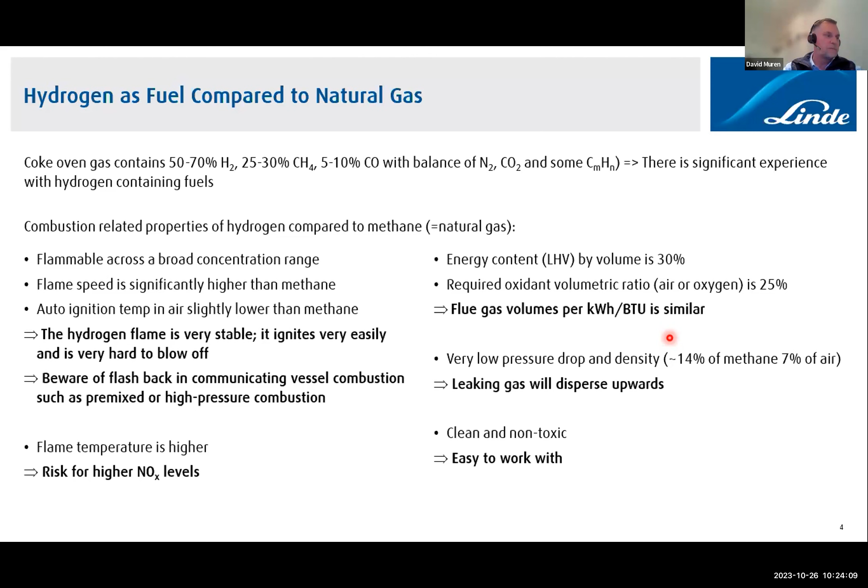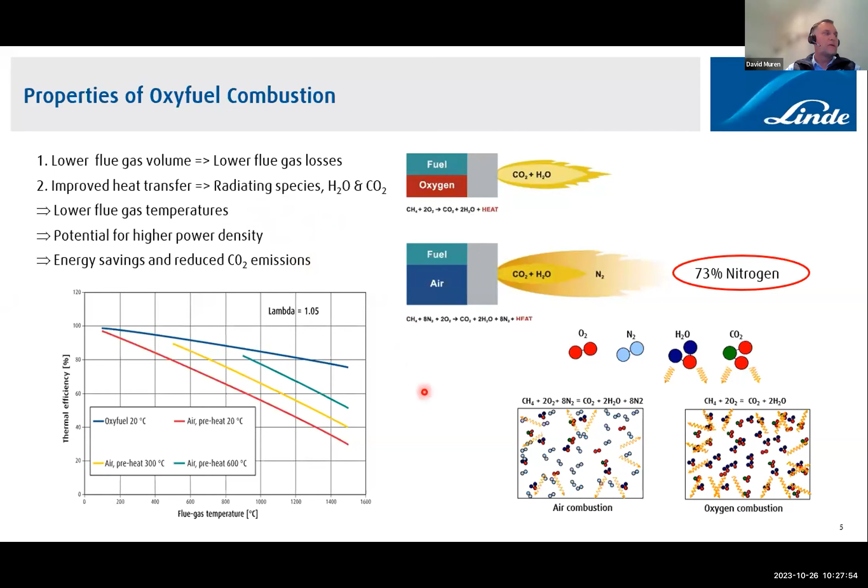Now, these two in combination lead to a lower mass flow of off-gases, meaning a longer residence time, and improved heat transfer means the temperature will come closer to equilibrium. So you'll have a lower off-gas temperature further along in Oxy-Fuel than in air combustion. You can also use that to fire harder since the off-gas amounts are lower. Both of these will lead to energy savings and CO2 emissions reduction.

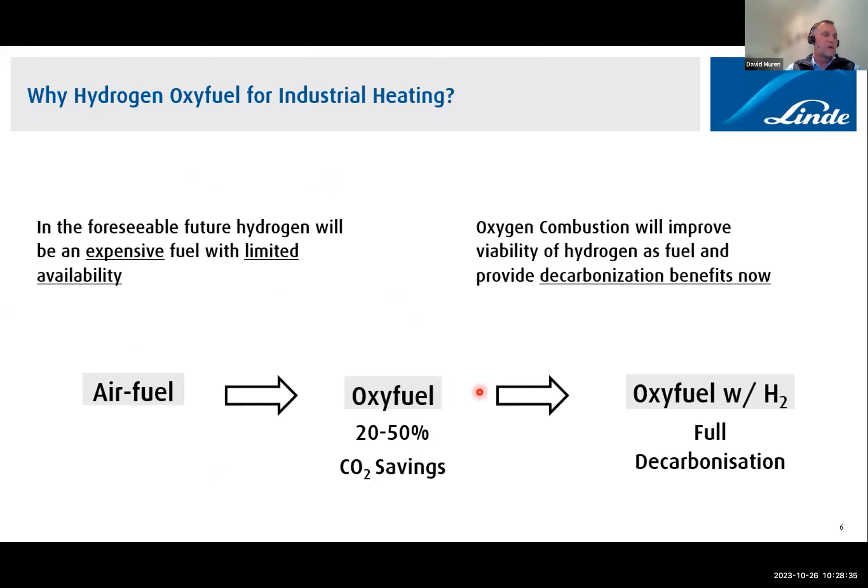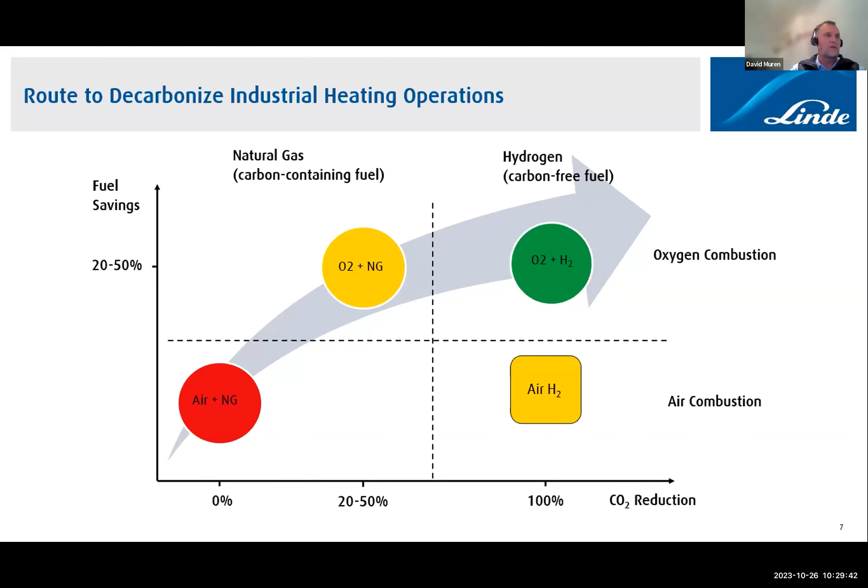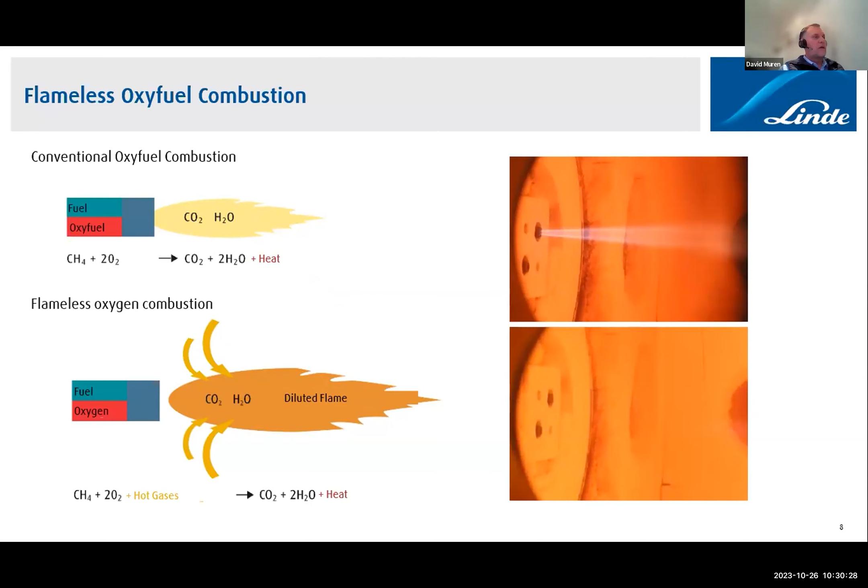That means low flame temperature even with hydrogen as fuel. This was tested at our combustion lab in Stockholm in 2019 with material from our customers, using both engineering steels and stainless steels, doing a heat-up and a 1, 2, and 3-hour soaking of the material to look at both combustion properties and material properties like scale formation, decarburization of the steel, and any effect on the alloy.

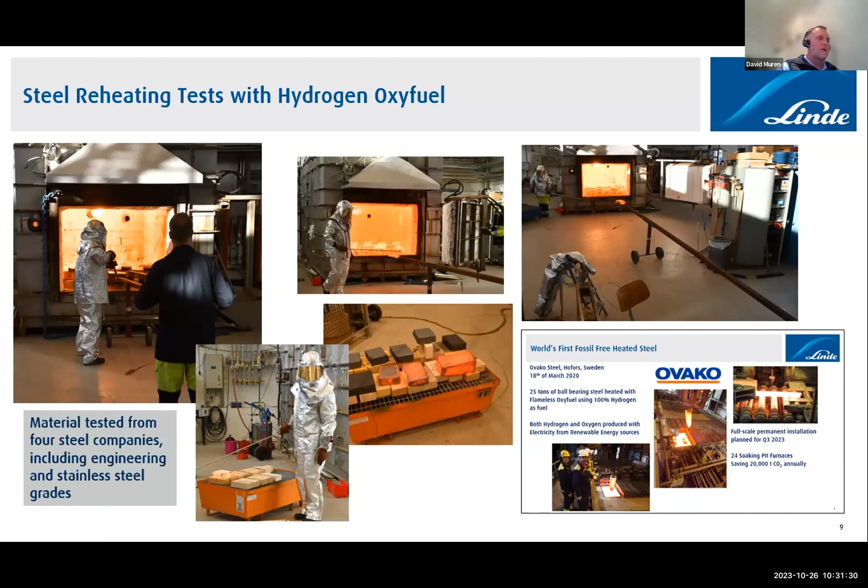What was concluded in these tests was that there was a very insignificant effect on scale formation and on the base material. Also, we saw that we could achieve similar concentration emissions of NOx as with natural gas as fuel.

Now, we did similar trials with aluminum melting. Here the focus was to look at dross formation and also the content of hydrogen in the melt. These were quite successful, and we showed that even high magnesium-containing alloys, which are sensitive, could be processed without any concerns.

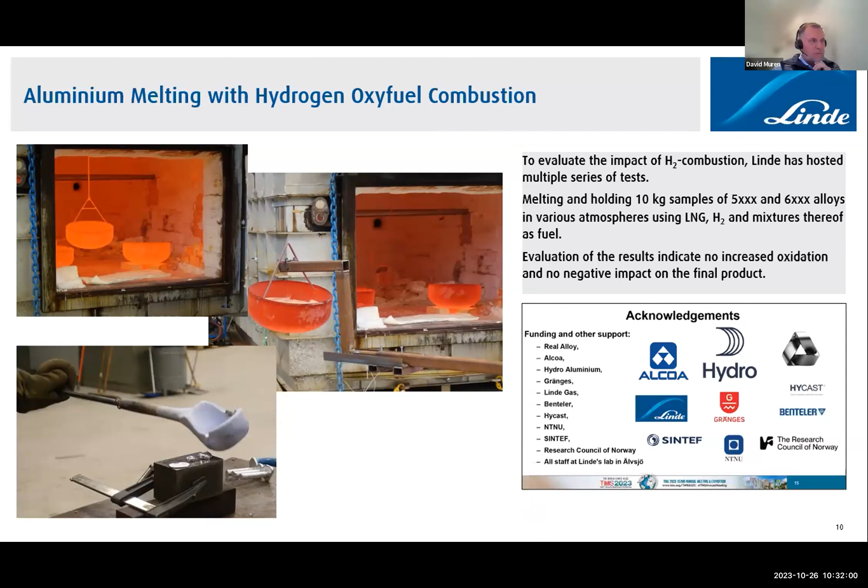Now, getting to the summary. Oxy-Fuel combustion with existing fuels will significantly reduce CO2 emissions by increasing fuel efficiency. We have demonstrated that reheating furnaces and aluminum melting can be operated with hydrogen as fuel without any negative impact on the process or the materials heated or melted. Flameless Oxy-Fuel works well with hydrogen as a fuel, maintaining the benefits of low NOx formation and temperature uniformity in the process as well.

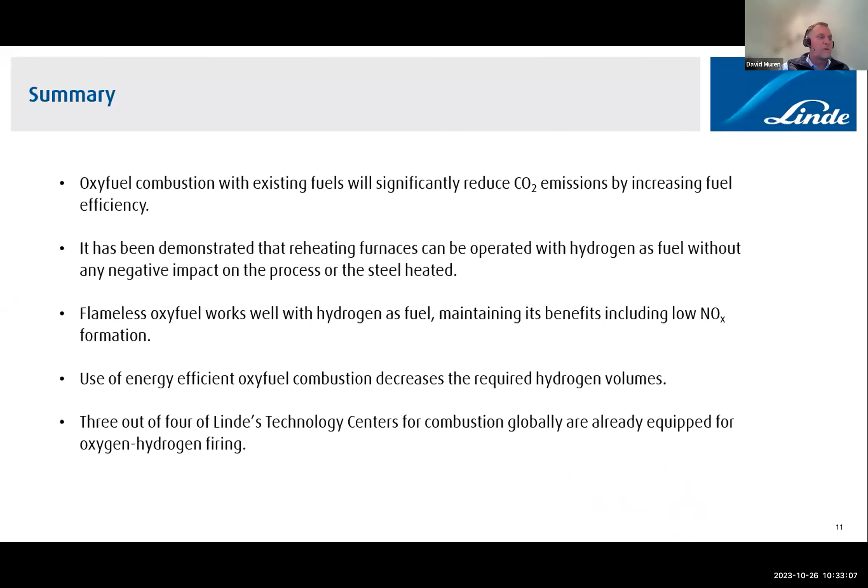So we see that the use of energy Oxy-Fuel combustion decreases the required volume supply of hydrogen for the process. Now, 3 of our 4 Linde technology centers globally are equipped for hydrogen combustion, and the 4th in China is looking to do that in the next year or so.

That's the end of my presentation. Thank you for the time, and I'm sorry if I ran a bit late here. You're pretty close, David, you're only 1 minute over, so I think we're pretty good on that one.

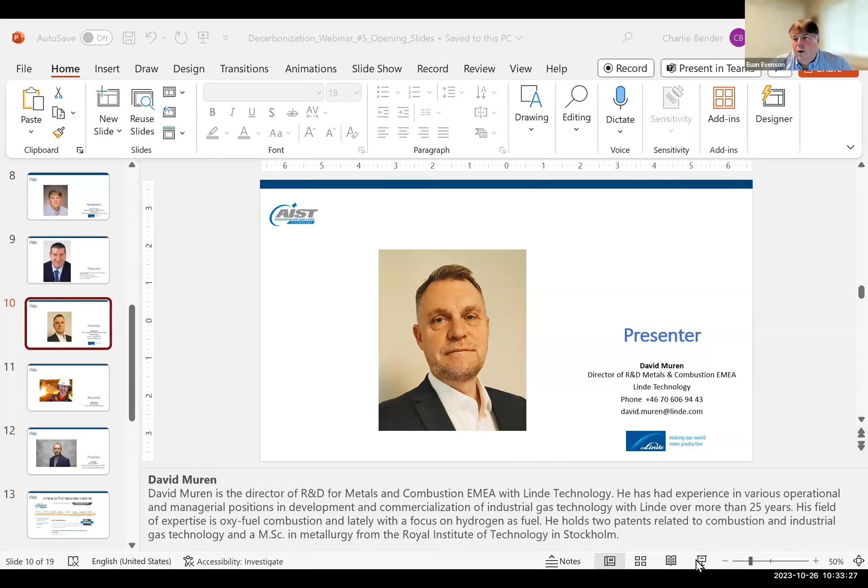One of the points that's been raised, and it often is when people are considering hydrogen combustion, is that since the density of hydrogen is much less than other gases, does that affect the size of the nozzles? And for that matter, does it affect the size of piping as well? Will the hydrogen nozzle be larger or smaller than a regular lance? So maybe, David, you can comment on the experience converting fossil fuel fired systems to hydrogen, the changes required, and how difficult it is to do.

It's a very good point, and you can say that there are two mechanisms that I mentioned. First of all, the lower energy density means that you need to put through 3 times the flow, but then the lower density also means that there's lower flow resistance to the hydrogen going through. What we've seen is that you need to have a slightly higher pressure to use basically the same equipment as you have today. Somewhere it's going to be dependent, but somewhere between 20 to 30% higher than what you have today.

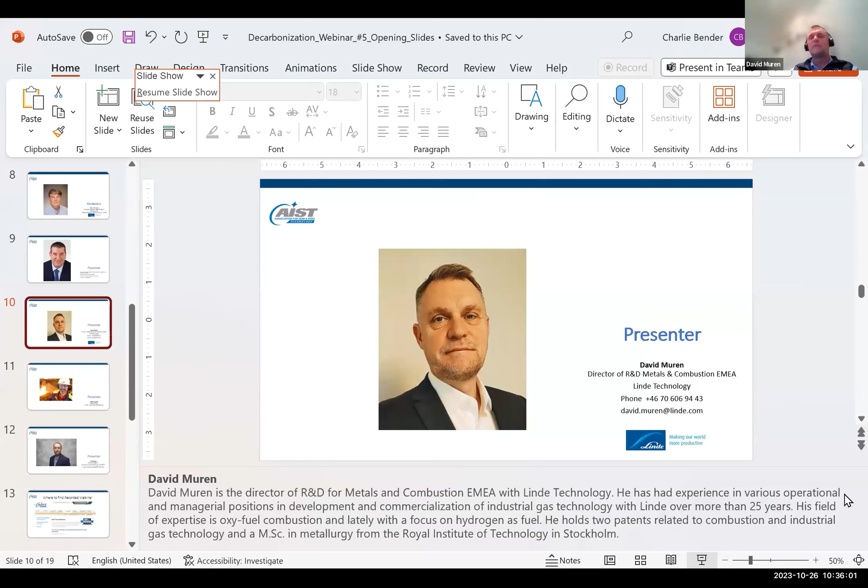So it is slightly higher, but not dramatic or significant in most combustion systems, especially since the hydrogen most of the time will come supplied at a higher pressure than the natural gas, provided that your combustion system can tolerate that. Now, when it comes to nozzles, yes, higher flow through, but then you also have the aspect of increased flammability, and also lower mass of the gas stream coming out. So these two effects seem to, at least in most of our stage-type combustion, counteract each other, so you can achieve the same type of flameless combustion with a higher flammability. So higher speed of the gas and increased flammability counteract each other, so you'll still achieve similar type of performance, I would say.

Okay, thanks. There's a question with respect to the economics of Oxy-Fuel, not specific to hydrogen, but Oxy-Fuel in general, relative to air fuel. I know that you have a lot of experience looking at that in different parts of the world. Can you make some general comments on that? Yeah, I mean, the general comment would be if your fuel is cheap, it's going to be much more challenging to motivate you using oxygen as an oxidant compared to air.

Now, with that said, if you have on-site production, you might have periods where you have excess oxygen available, and we have systems and methods of hybrid oxygen combustion where that oxygen can be utilized when it's available, and then you can revert to your air combustion when it's not. Another interesting aspect is if you have on-site hydrogen production, you will also produce oxygen. Now, how that is captured in your electrolysis is a different story, but going forward, when the volumes get greater, if that oxygen is captured, dried, and pressurized, it can be used in the combustion process. I think our next presenter may comment on this, actually.

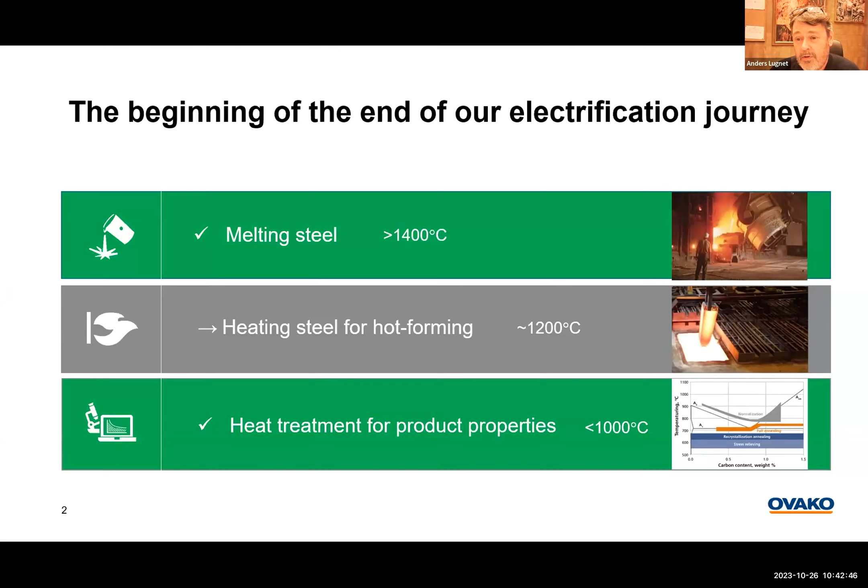About 64% of our carbon dioxide emissions come from combustion, and all that part can be replaced by hydrogen. We have a plan that by 2030, all our combustion carbon dioxide will be eliminated, using hydrogen from electrolysis. The next step will be biochar instead of petroleum coke and anthracite, but that's a different story.

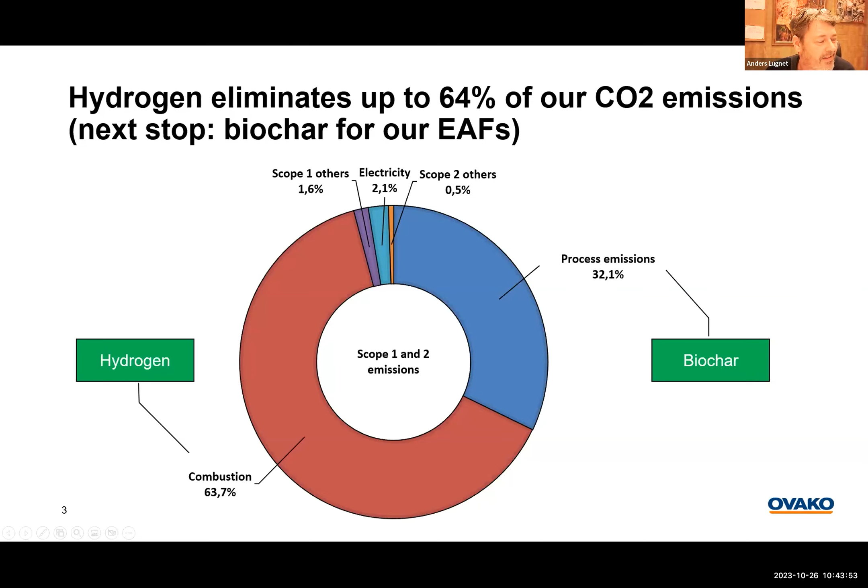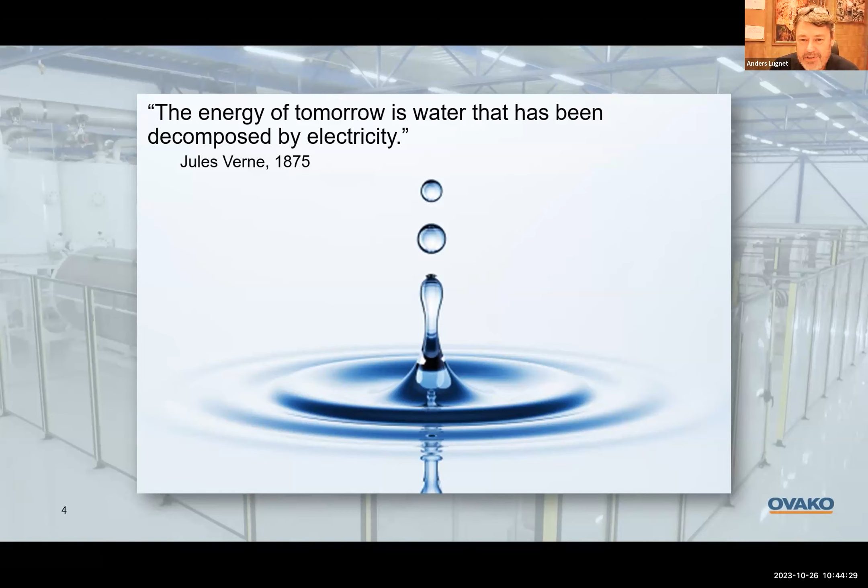The French science fiction author Jules Verne said this 150 years ago: 'The energy of tomorrow is water that has been decomposed by electricity.' 1875—that's pretty amazing. Most people didn't know about electricity at all back then, but this guy talked about what we are actually doing now, 150 years later.

So why do we go for hydrogen as fuel for reheating furnaces? David has explained most of it, but if we look at it this way: rolling mills normally use fossil fuels such as natural gas, propane, or oil to fire the furnaces, most often with air as oxidizer. This usually gives a carbon dioxide load between 100 and 200 kilograms per ton of steel in the rolling operation alone.

These processes are extremely difficult to electrify directly with resistive heating. So hydrogen as fuel with pure oxygen as oxidizer gives the highest efficiency and zero carbon dioxide emissions in the reheating process, if the electricity comes from fossil-free sources.

Another really good advantage in reheating is that when you use hydrogen, there is absolutely no risk of carbon monoxide at all. So it's a good environmental thing within the factory and for the people around the furnaces.

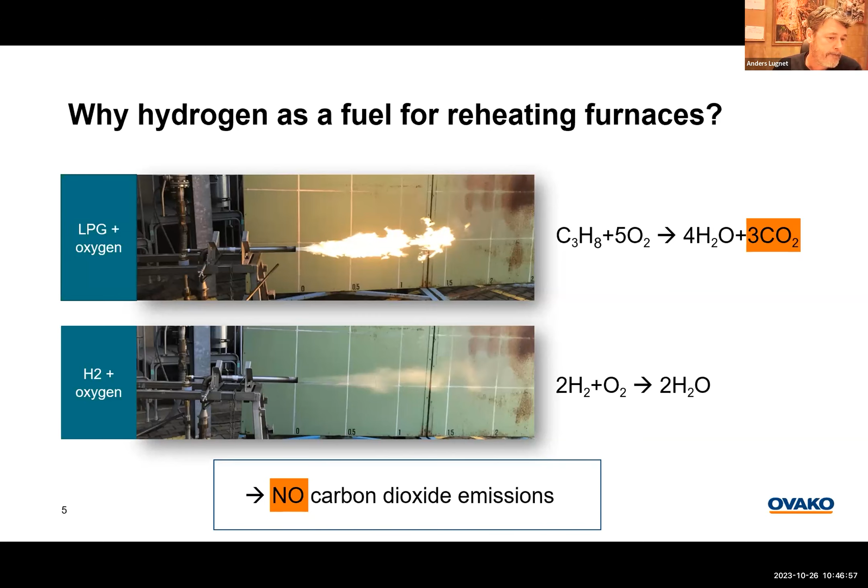Our systems—there were questions about changing nozzles and stuff. We use Linde burners, flameless, made for propane, and it is absolutely no problem at all to use those burners with hydrogen instead. We can switch fuels in a split second, and that's what we do.

Because of this, we actually don't need hydrogen storage—we're not dependent on hydrogen. Our storage is our propane tanks; we have 800 tons of propane as our energy storage. So we only have a very small hydrogen buffer, really, for about half an hour's use. We use the hydrogen at the same pace as we produce it.

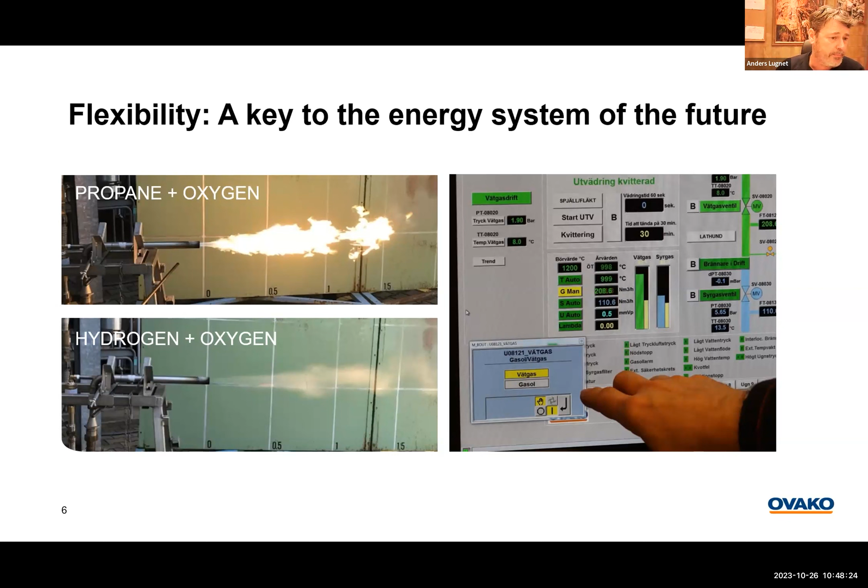I would say about 15 years ago, the thoughts came into my mind about using hydrogen and oxygen. The reason for that was that the environment around these furnaces was really terrible. They were, at that time, many of them heavy oil fired furnaces, and it was smoke, soot, carbon dioxide, oil leakages and stuff. So at that time I thought that hydrogen and oxygen, that must be the future when it comes to clean factories and so on.

In 2020, in March, COVID had shut down the world, but Ovako, together with Linde, we made the first full-scale trial during this period, and we showed that this works also in real production. Lab is one thing, but how will temperature uniformity and so on be? We did this in production scale, and we showed that it worked. This was extremely important to show. It would have been a showstopper if the results were not as good as when we used LPG as fuel. But the trials showed that there was no negative impact whatsoever on product quality or rolling results.

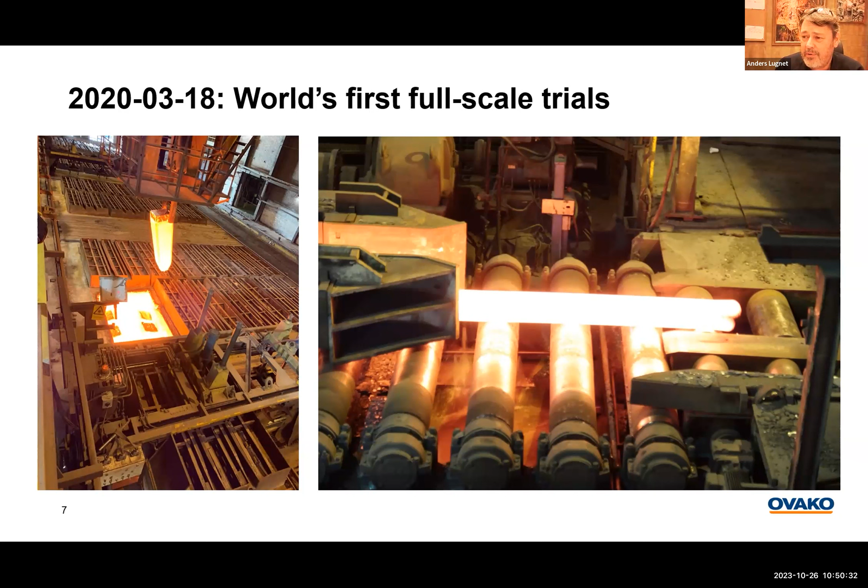So from this point on, we really tried to work to implement this in a larger scale. And how did we get there?

We had a strategy that our board took some 10, 11 years ago. At that time, the strategy was how could we reduce fuel use and so on, but it was really adjusted in 2020 to how can we reach zero emissions.

The points have been that we will use electricity wherever possible, and we will use direct electrification where possible. We think below 1000 degrees C, you can still have good productivity with direct electricity. Another point was that we will go away from oil and we will go towards LPG.

We will change our air fuel systems to Oxy-Fuel systems, and we have done that. We have 60 installations today with Oxy-Fuel. Also we standardized how we work with our control and automation equipment. We have about 130 furnaces in the company, and it's important that we don't have too many different systems here.

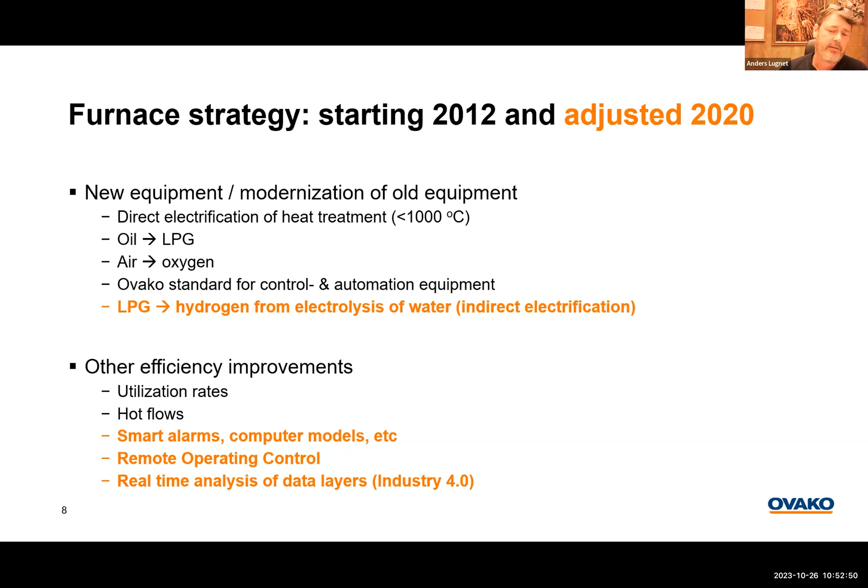What we added in 2020 after our full-scale trials was that, when possible, we will use hydrogen from electrolysis of water instead of LPG. So that's what we have been working with.

There are on paper advantages to using an old building, but I would say it's not recommended to do that, because a lot of things happen that you don't plan for.

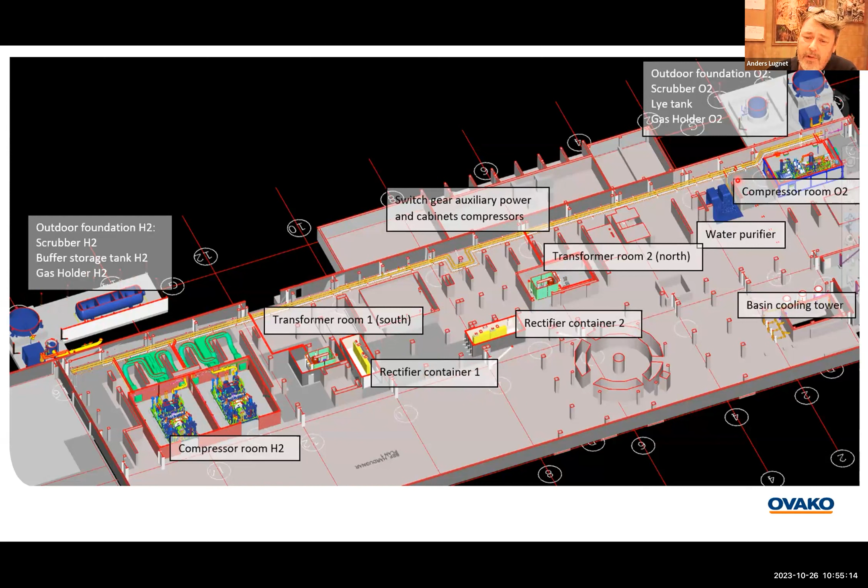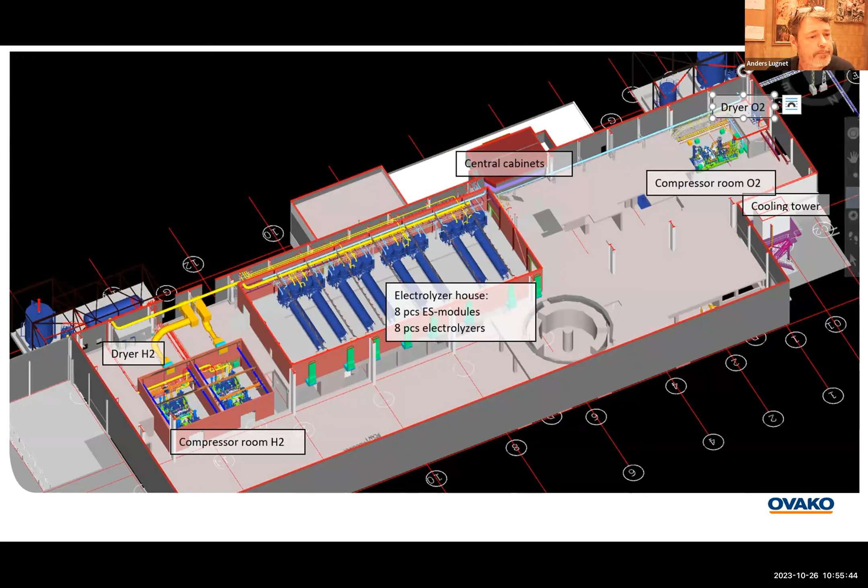And on the first floor we have the electrolyzer house. It would have been much easier to make a new building somewhere else rather than using this old building, for sure. It took longer and it was more expensive than expected. But this is what it looks like today.

Professionally, this is a real milestone for me. It's using fossil-free electricity to split water into hydrogen and oxygen to replace fossil fuels. This makes a difference when it comes to decarbonization. This is, as you see, the real thing. It's of course a PowerPoint, but this is as close as you get without actually being there.

For Ovako, this is really the starting point. We will make 5 or 6 of this type of hydrogen plants until 2030. That's our plan. So we are trying to take the lead in this area, and I think the picture says it all. Our industry doesn't need to be dirty. This is really clean energy in a clean environment.

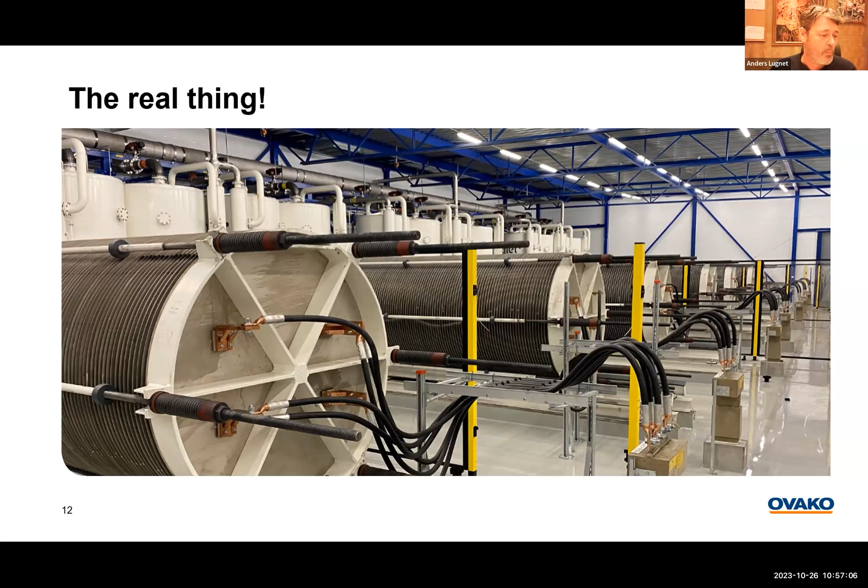So what about the energy balance? Is it worth it? You often hear that it takes huge amounts of energy to produce hydrogen, and the efficiency is terribly low. But I think in Ovako's case, that's not correct. If the target is to eliminate carbon dioxide from the process, I would say that this is by far the most efficient solution available.

And in Ovako's concept, we don't only use the hydrogen, we also use the oxygen, and we do recover some of the waste heat to our district heating system. So the efficiency is about 76% at full load, and I would say that's not bad at all. And that's before any flue gas recovery. So what you see here is that the green colors show useful energy, the red is losses, and blue is the potential for flue gas recovery.

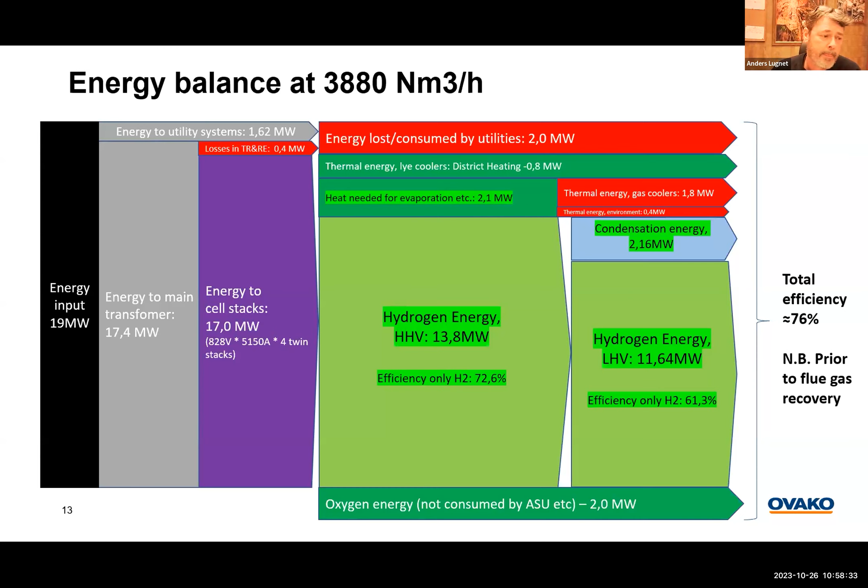So what do we think is the success factors to do this? We for sure believe that you need a large continuous hydrogen offtake at low pressure, and when I say low pressure, in our case it's up to 39 bars, but with today's standard, that's low. You often hear gas industry talking about 700, 800, 900 bars now on hydrogen, but of course it costs to compress. So I think a large continuous offtake at low pressure is key.

Also, we believe that you should build systems where you don't need to have huge hydrogen storages, because hydrogen storage is extremely expensive. We would rather buy another electrolyzer than making a storage. We have our existing LPG infrastructure as storage. Also, it doesn't make you dependent on hydrogen. So as I said earlier, we only have a very small hydrogen buffer.

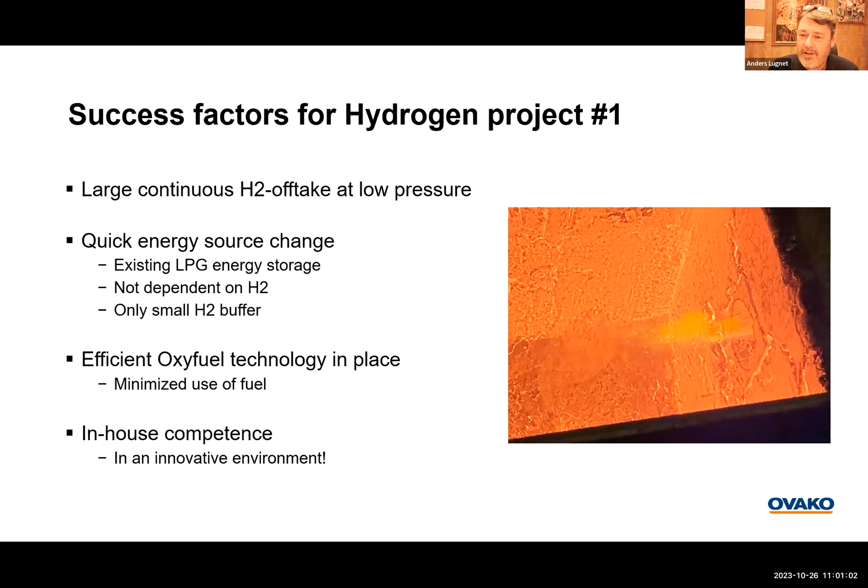So these were the success factors. And by that, I'm ready.

Well, thank you very much, Anders, for an excellent presentation. Very interesting, and it shows that definitely Ovako is working in the future. I have several people who are very interested in your presentation, so there are several questions to be answered. So I'll start with the first one.

Your EAF doesn't have any natural gas burners, is that correct? Or do you have supersonic oxygen in your EAF? We have 3 EAFs, and 2 of them use supersonic burners, with propane today, but we will for sure try hydrogen on these ones. Okay, but that's not the first step.

Okay, thank you. Are there any efficiencies or reduction in power demand to be realized when utilizing hydrogen as a fuel source in designing the overall system to produce metals? Well, in our reheating furnaces, we already have Oxy-Fuel systems installed, and to change from, in our case, LPG or natural gas to hydrogen is really no issue.

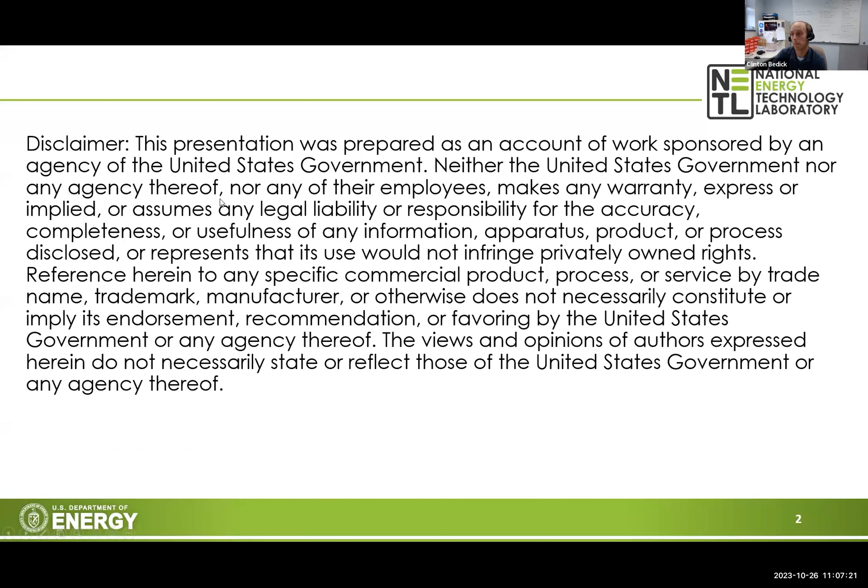I'm just going to give a quick picture of what the National Energy Technology Lab is. We're one of 17 DOE national labs in the US, focusing on energy research and development. We're one of 3 applied research labs, and we're uniquely government owned and operated. We have 3 locations: Albany, Oregon; Pittsburgh, Pennsylvania, where I'm located; and Morgantown, West Virginia. There's kind of 2 arms: one administers and monitors DOE funded projects that go out for solicitation and award, and the other is the in-house research that goes on at these labs. That's where I work.

Some of the major initiatives we're looking at now are decarbonization and carbon management, and that's kind of where this ammonia work falls.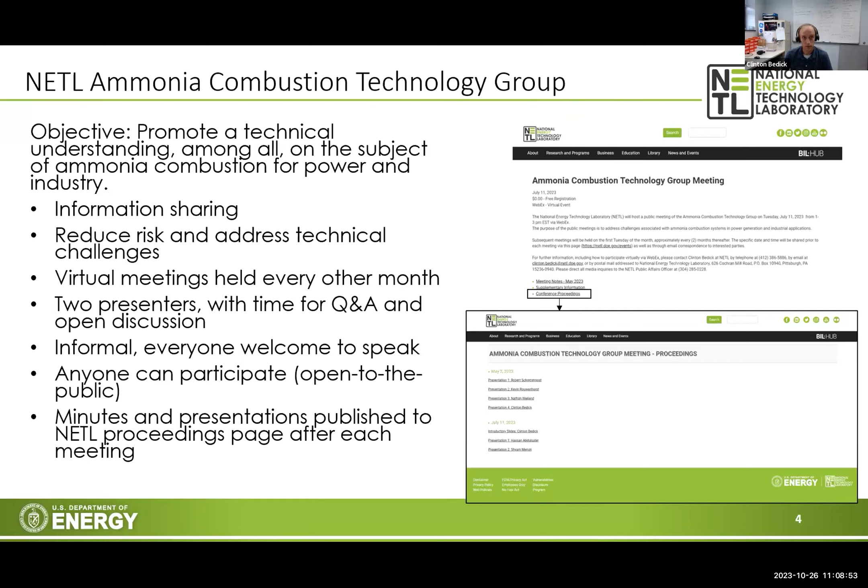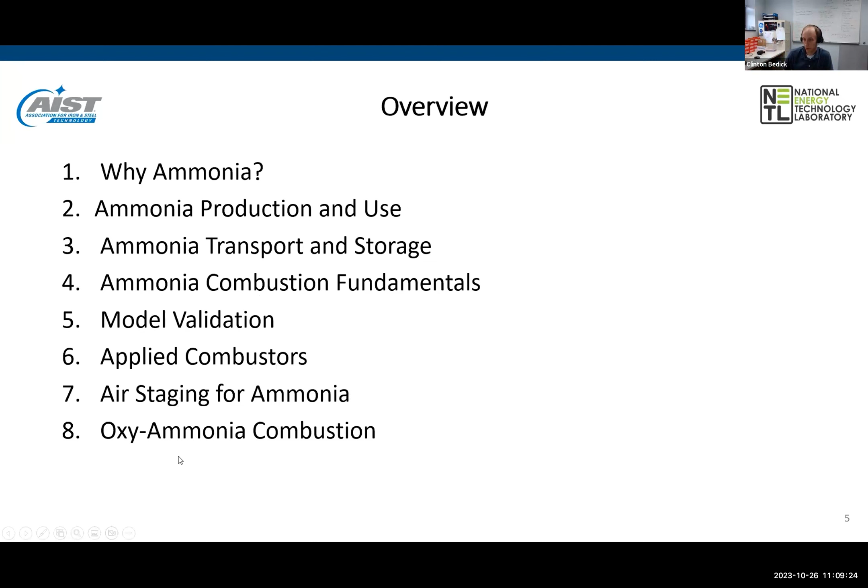So what I'm going to talk about today: why ammonia, starting there, some brief comments on production, transport, and storage aspects. Most of what I'll focus on is the fundamentals and unique technical challenges of ammonia, looking at things like model validation, doing this in more applied systems, introducing the concept of air staging for ammonia, and closing out with a look at oxy-ammonia combustion. So really, what's the role of ammonia?

Certainly a hydrogen carrier, right? So there's 3 molecules of hydrogen, 1 nitrogen molecule. Similar to hydrogen, it can be a carbon-free fuel, and similarly it can be used as chemical energy storage in the energy sector. It addresses a few of the challenges with hydrogen, and that's really the main interest here. Hydrogen has low volumetric density, so you have to store it at high pressure or very low temperature to get it into a liquid, and that can be energy intensive with high capital and operating costs. On the contrary, liquid ammonia can be stored at about 10 bar or minus 33 C, so it's more in line with what we're used to with LNG and LPG fuels. The other big advantage is an existing ammonia industry, mainly surrounding agricultural applications, so it's everything from synthesis, transport, and storage. One application could be converting hydrogen to ammonia, transporting it, then converting it back before utilization. But really the big interest would be in direct utilization—if you can avoid that reconversion and directly use it in gas turbines or furnaces, there's certainly going to be an efficiency advantage there.

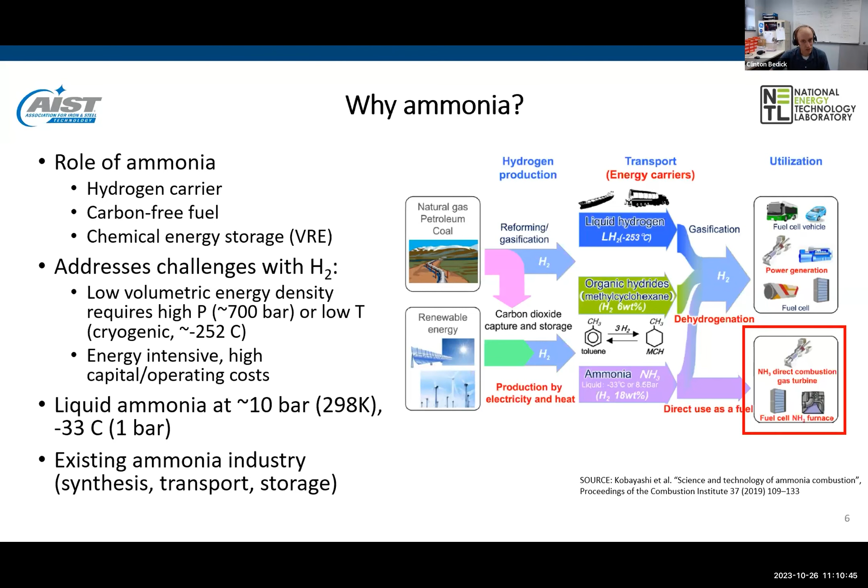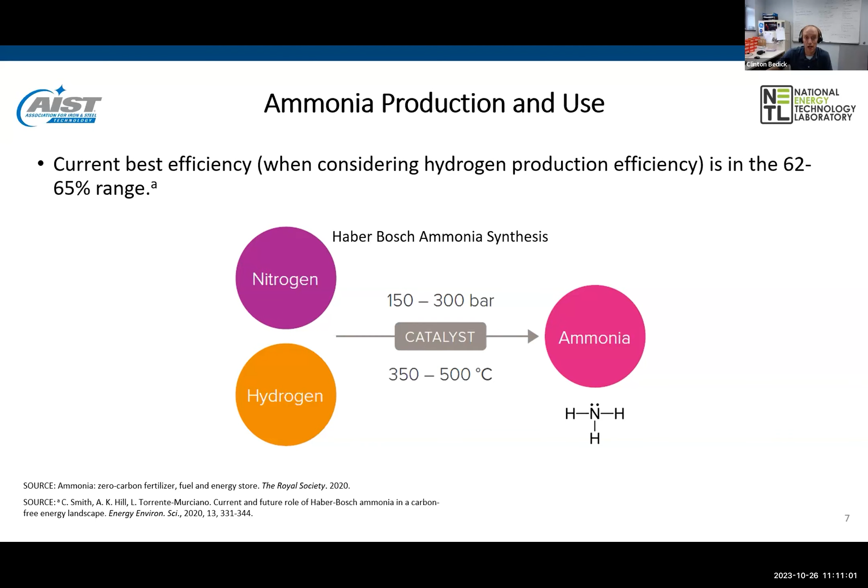Ammonia production is usually done using the Haber-Bosch synthesis. You have to generate hydrogen, combine hydrogen and nitrogen at high pressure over a catalyst, and you generate your ammonia. Similar to hydrogen, there can be various colors depending on the carbon intensity. Ultimately we'd hope to get to a fully green scenario where we're electrolyzing water—the last presenter showed some great examples of that—and then going to ammonia is a second step where you'll need additional sustainable electricity input. In the interim, what's typically done now is utilizing fossil fuel feedstocks, doing some reforming to get hydrogen and carbon dioxide. We can have a blue route if we capture that; otherwise it's considered gray or brown, which can have a considerable CO2 impact.

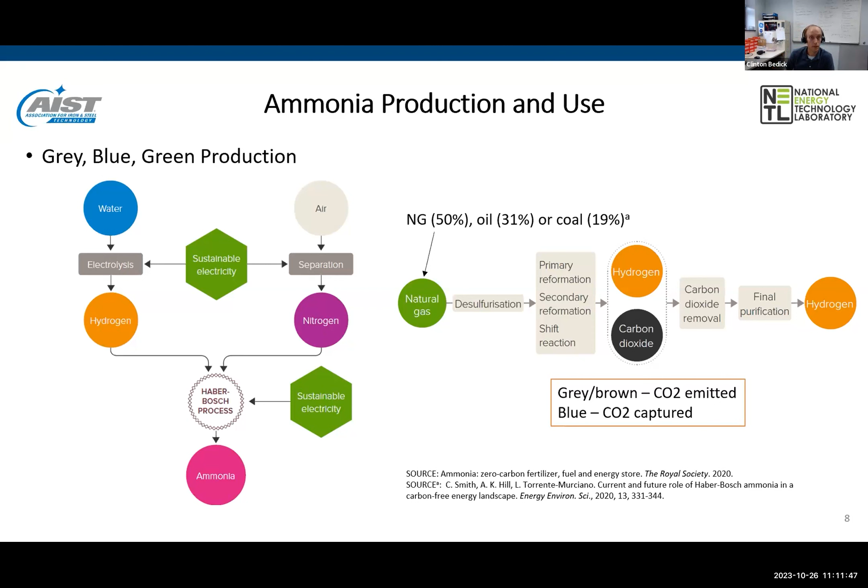There are existing worldwide shipping routes and pipelines in the US for ammonia, so that infrastructure does exist and could be expanded. One of the other considerations here is ammonia versus hydrogen.

Comparing these things, this is some results from an IEA study done a few years back, looking at costs of transport. One of their findings was that hydrogen made sense for shorter distances, but as you got to longer distances or long shipping routes, it made sense to convert to ammonia to do that transport and then convert back on the other end.

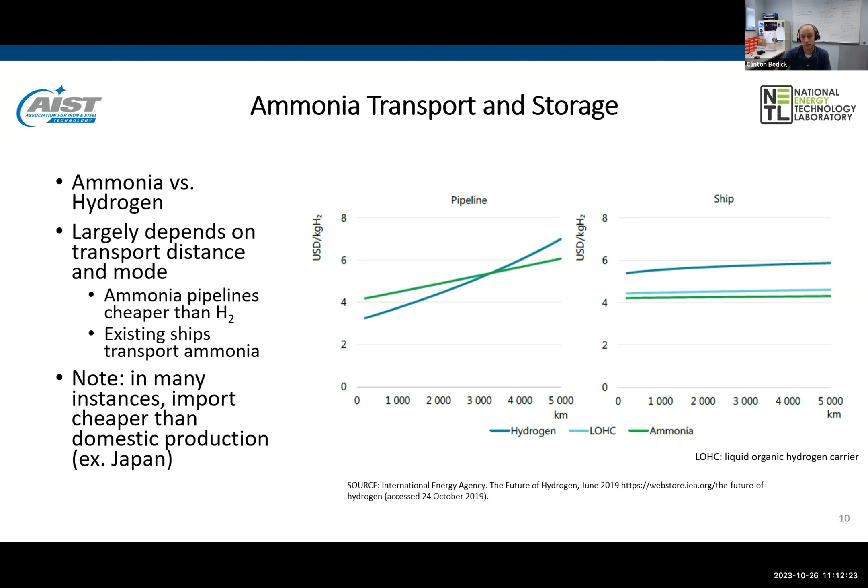I'm going to talk about the fundamentals a little bit, but first I just want to point out that while it's kind of new to look at ammonia as a carbon-free fuel, it has been done in the past. Back as far as the 1940s, there were recip engines running on mixtures of coal gas and ammonia. In the 1960s, the NASA X-15 used ammonia as a fuel. Pratt at UC Berkeley and Solar Turbines looked at it as a fuel.

Their general findings were it was tough to burn. Scale was important, how you design and modify a combustor. In a lot of cases back then, they had to use additional catalysts and different things to improve the combustion characteristics and get these things to run.

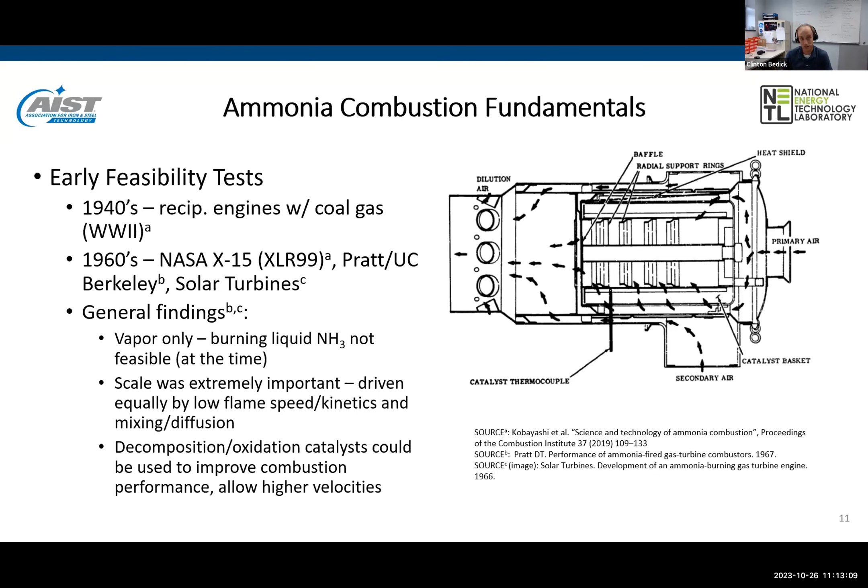From a fundamental property perspective, ammonia has a lower heating value and flame speed compared to hydrogen or hydrocarbon fuels. There's also some volumetric energy differences, so it's about 40% that of methane. You're going to end up needing about 2.5 times the fuel flow for equal power output, and certainly a narrower flammability range.

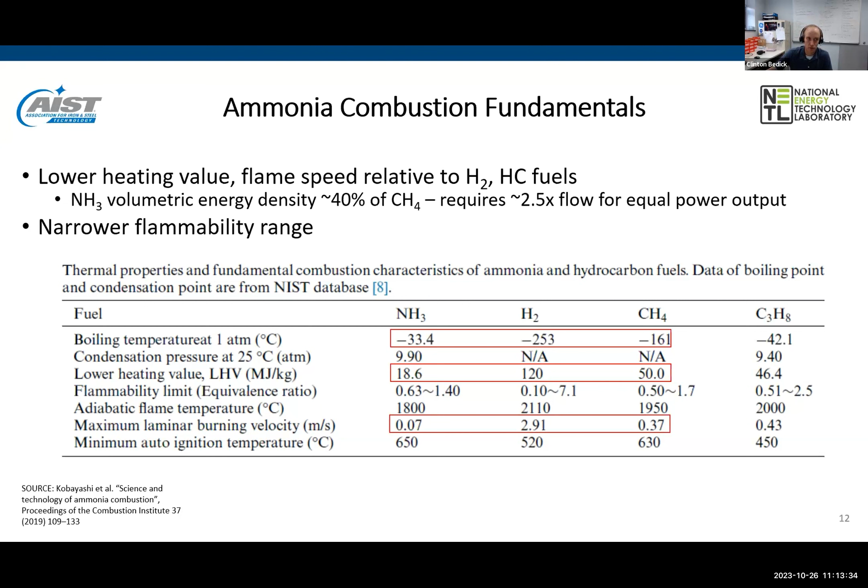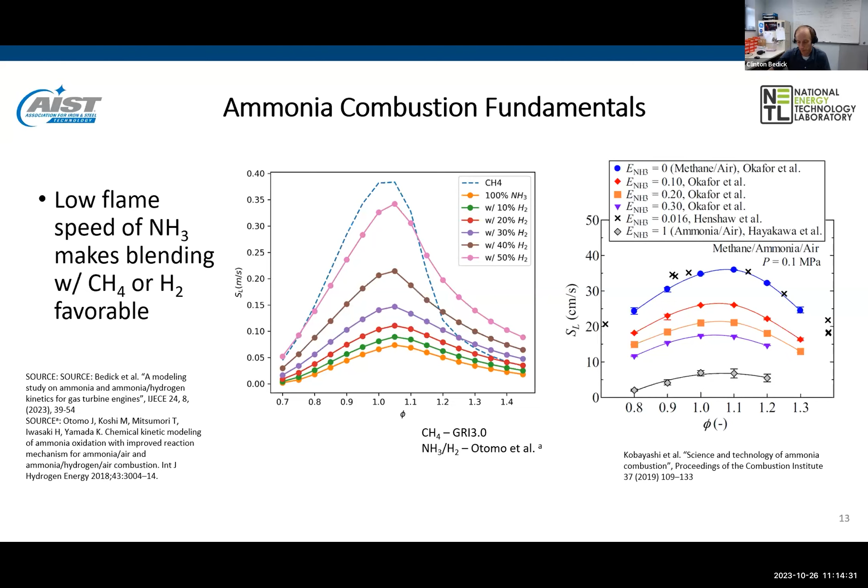The blue line here is methane. You can blend your ammonia with varying amounts of hydrogen, and at about 50% you can sort of match that methane flame speed. Methane is another thing you can blend with. Of course, there's still going to be carbon emissions in that case, but you're going to need a lot higher blending ratios to get the flame speeds comparable with those methane systems.

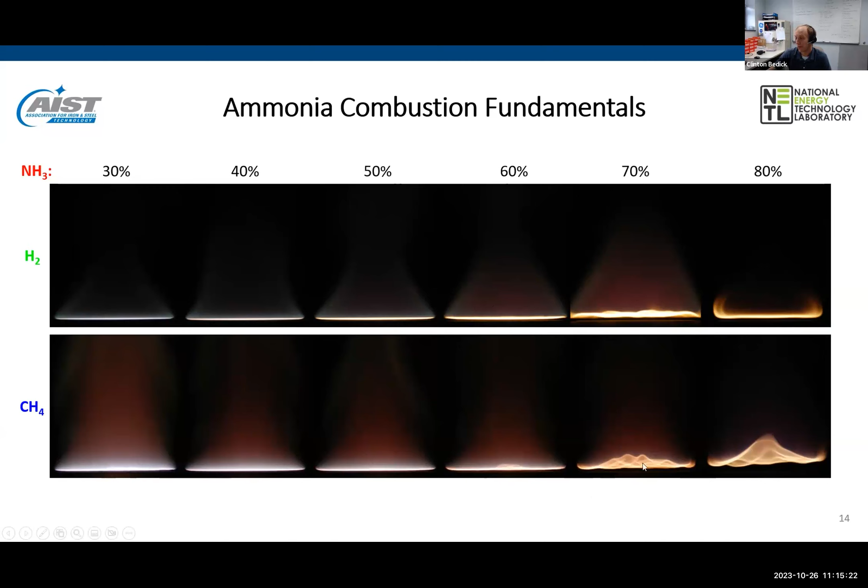It's very well stabilized. As you add ammonia, you start seeing this characteristic orange color, which is from the emission from ammonia-based compounds. You also see the flame zone thickening considerably. The flame starts to stand off and wrinkle up, and eventually it's going to end up blowing off. That blow-off point tends to be sooner for the methane, just because it has a lower flame speed compared to hydrogen.

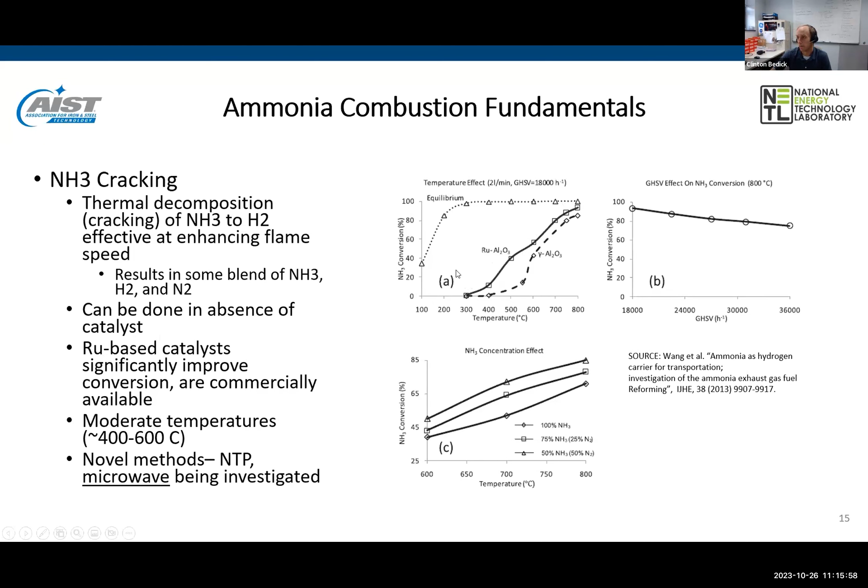One other effective way to enhance the flame speed and combustion properties here is using cracking. You can thermally decompose ammonia to hydrogen, resulting in a blend of ammonia, hydrogen, and nitrogen. You can do this in the absence of a catalyst, but it's been shown that some simple, widely available ruthenium-based catalysts can be pretty effective. Depending on temperatures and residence times in these reactors, you can almost fully decompose your ammonia to hydrogen with that process.

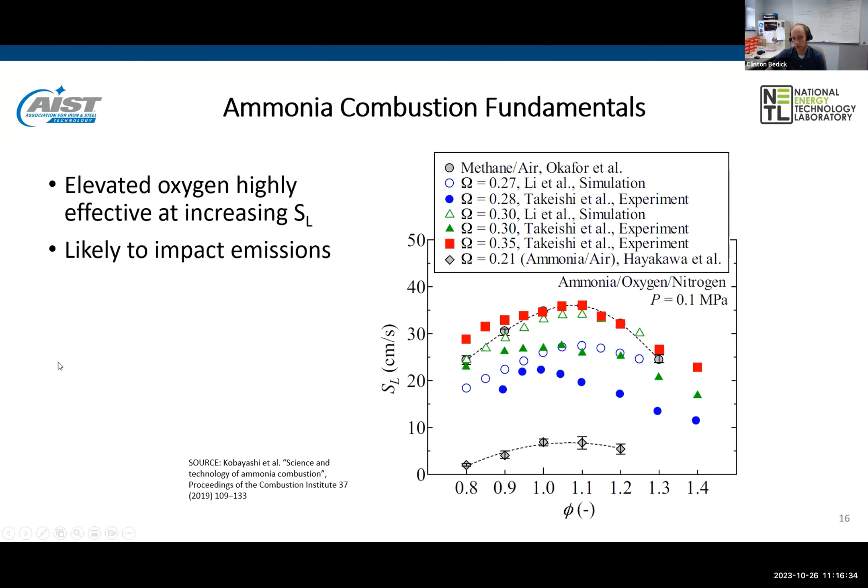So kind of the crux and the big challenge here in ammonia is NOx formation. This is pretty challenging to overcome, and it's really because of this fuel-bound nitrogen. It's a very different mechanism than what we're typically used to in hydrogen or methane, and it can result in very high NO concentrations.

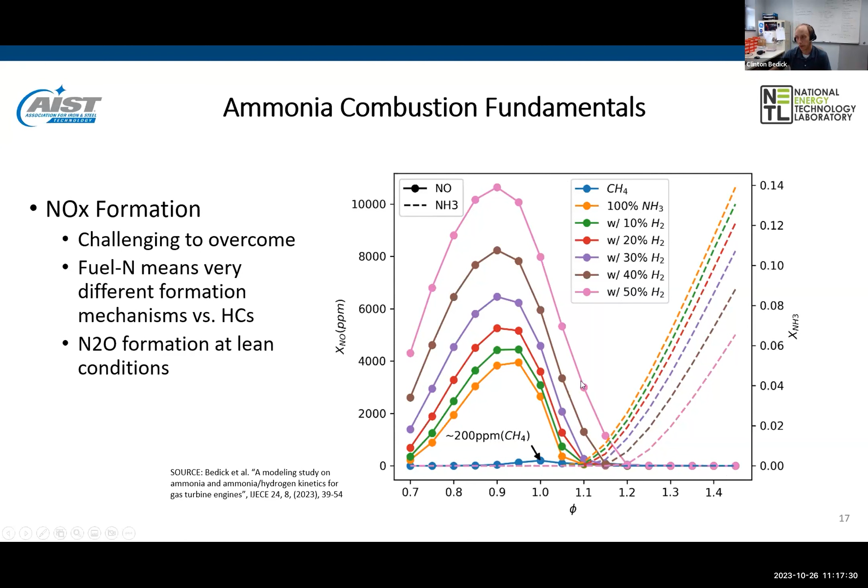These are some modeling results we did, shown down at the bottom here is the methane air case. You might expect 200 parts per million NOx at stoichiometric conditions. Under lean conditions with ammonia, you can be as high as in the thousands of ppm. Blending with hydrogen tends to exacerbate that, especially at lean equivalence ratios, where you can get very high NO concentrations. If you look on the rich side, you certainly can mitigate a lot of that NOx formation, but then you start getting lots of unburnt ammonia coming out in the flue gas.

This is really driven by the reaction pathways that are very different for ammonia than hydrocarbons and hydrogen. It originates from the fuel rather than nitrogen dissociation. That high temperature thermal NOx route does still exist, but it tends to be overshadowed. These fuel pathways greatly depend on the radical pool here - O, H, OH, these kind of combustion intermediates. So operating at rich conditions can limit a lot of those species and limit the NOx formation.

The other unique thing with ammonia is that elevated pressures tend to reduce the NOx concentration, which tends to be contrary to what we're used to with hydrocarbons.

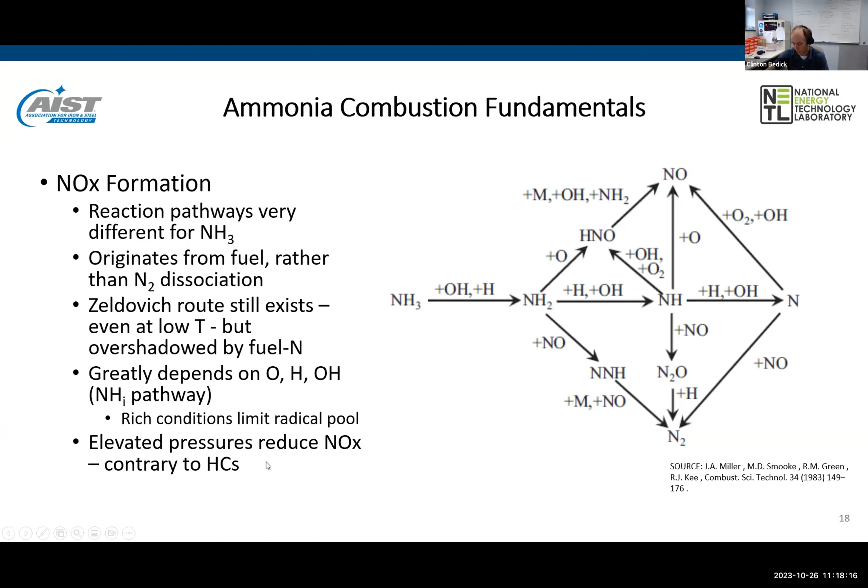I'm going to go through this one pretty quickly, but just to say that, I showed results from modeling over the past few slides. There's lots of available kinetic mechanisms specific to ammonia - some have carbon, some don't. There's a major need still for validating all of these models.

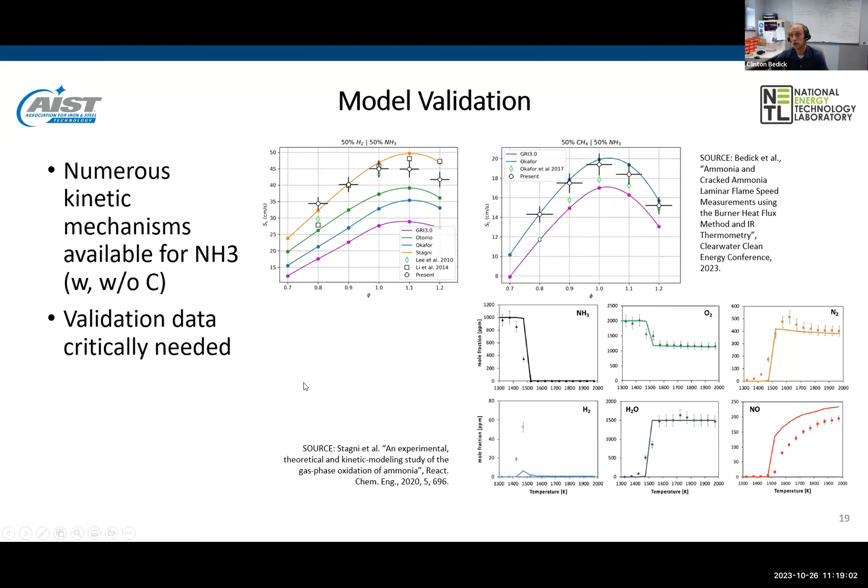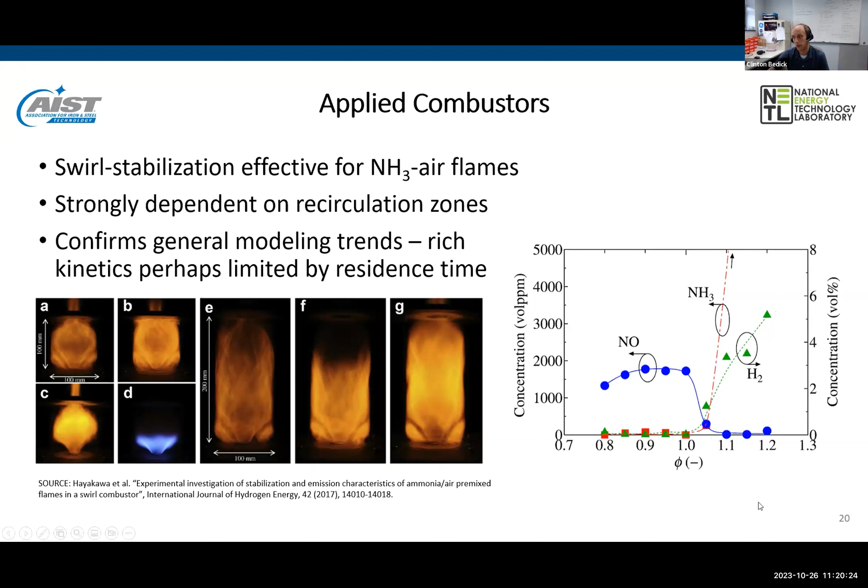So NO emissions under lean conditions in the thousands of parts per million. As you go to these rich conditions, a lot of unburned ammonia. You also tend to convert some of that ammonia to hydrogen, which we'll talk about what we can do with that in the next few slides.

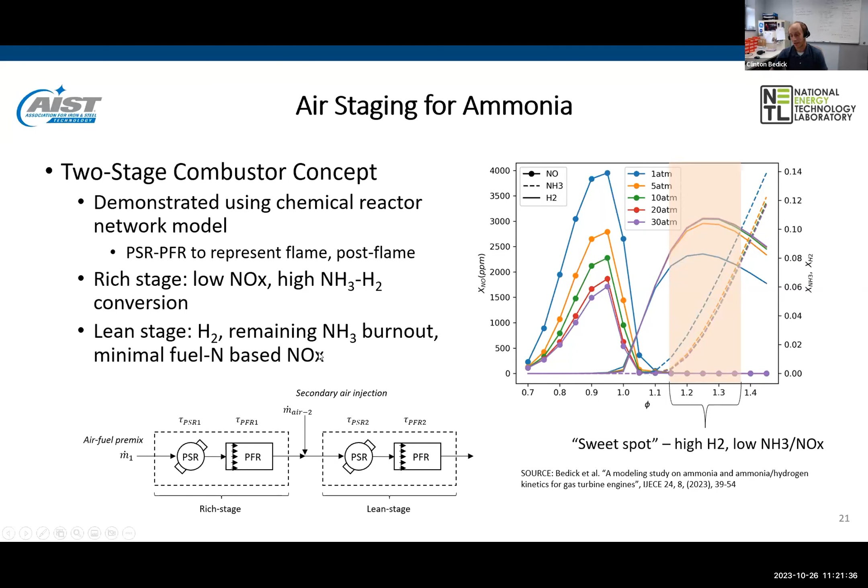And then you're kind of trying to get into this sweet spot of not having too much unburned ammonia. So in the second stage, you're going to burn that hydrogen, the remaining ammonia gets burnt out, and you're trying to minimize that fuel-bound NOx.

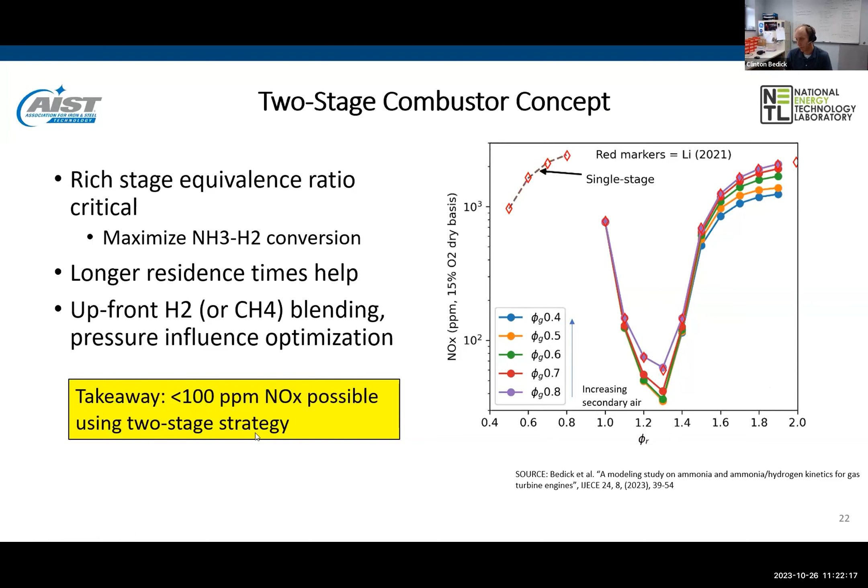Certainly these are just modeling results, so take those numbers with a grain of salt, but it's encouraging in terms of using this approach. There's some instances of experimental demonstration here.

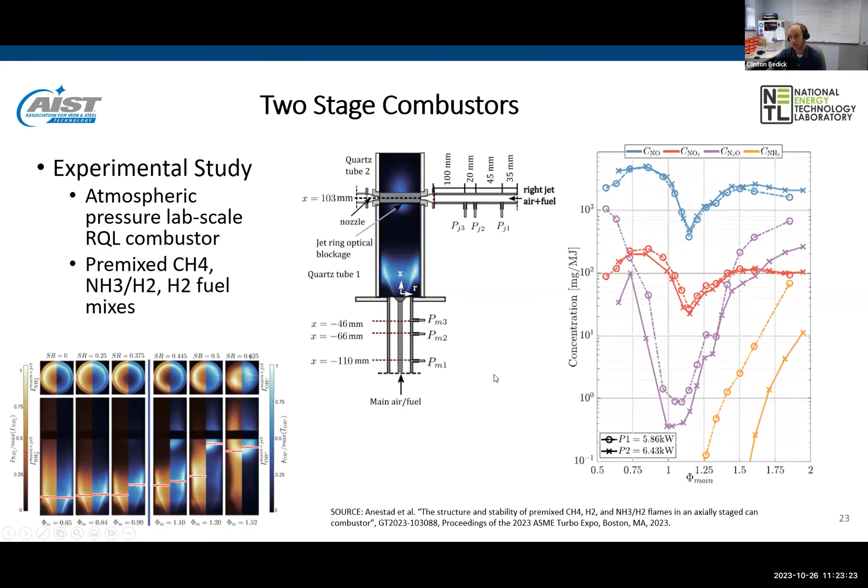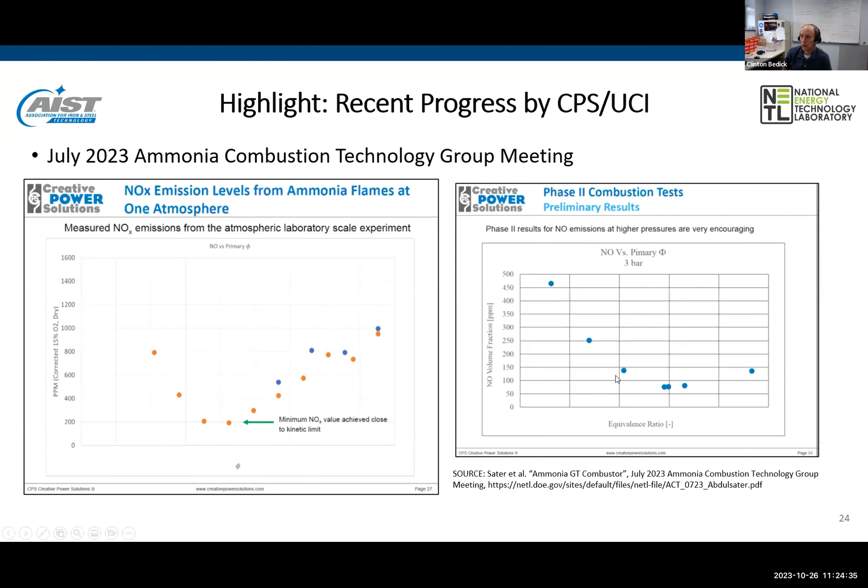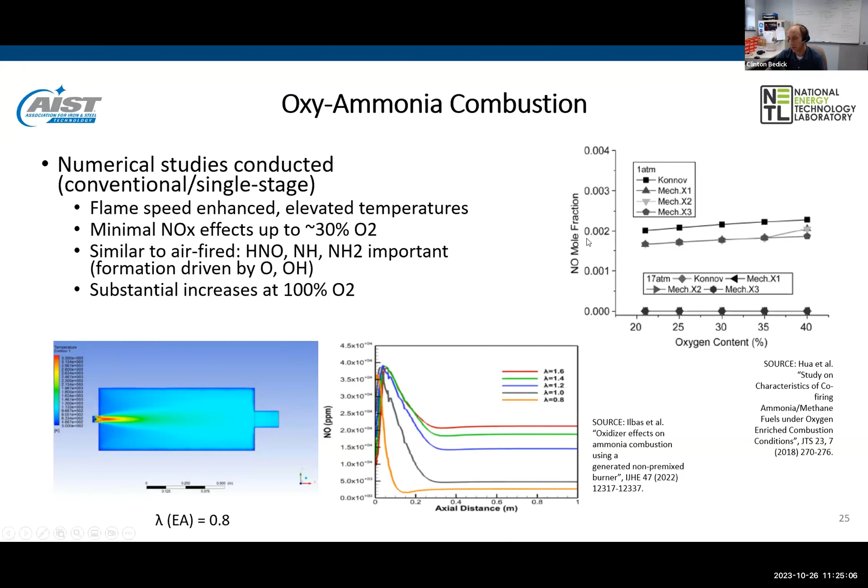Last thing I want to mention is just on oxy-ammonia combustion. There's really not a lot of results out for this. This is some results from a numerical study, showing minimal NOx effects up to about 30% oxygen, but substantial increases as you went up to 100%, getting into the thousands of parts per million, even tens of thousands. Also, one of the only examples I know of experimental oxy-ammonia results was from Linde in 2021.

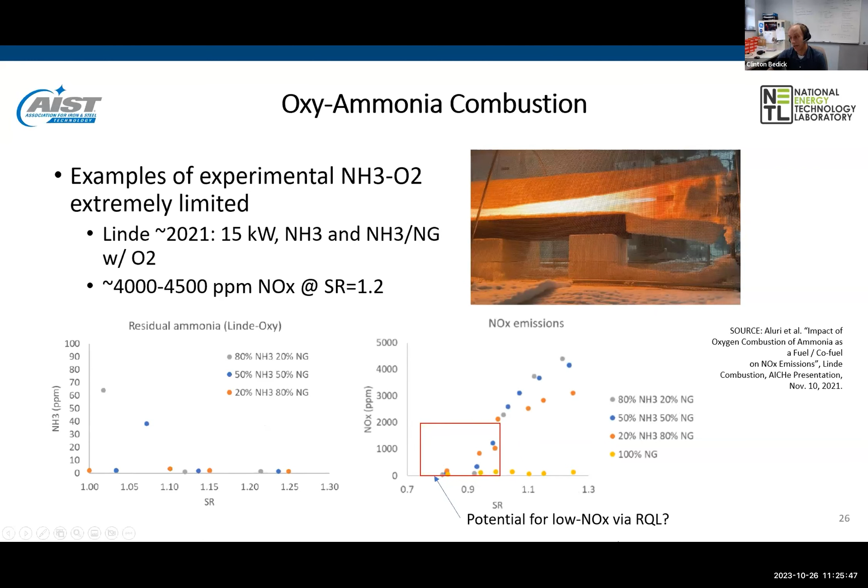They showed, I'm just going to highlight the NO on the right side here. They're looking at stoichiometric ratios, so over here is rich and over here is lean. For lean conditions it's in the thousands of parts per million depending on the amount of ammonia, but going into those rich conditions really helps to limit the NO production there. Again, this was a single stage typical combustor, so it might highlight a potential for low NOx if you implemented something like an RQL.

So just to conclude real quick, the high temperature and pressure of the Haber-Bosch process continues to be a challenge overall for ammonia. Transport and storage really depends on distance. On the combustion side, model validation is still needed to fully evaluate a lot of these combustion systems, and NOx remains the biggest challenge.

These two-stage strategies have been effective. The models can show sub 50 ppm. That rich stage equivalence ratio is very impactful, but we still need more data.

For gas turbine applications, we need high pressure data, above 5 atmospheres. Little testing has been done for oxy-ammonia. The applicability of current kinetic models is probably unknown for those oxy-fuel conditions, and data is needed specifically for furnace applications of ammonia.

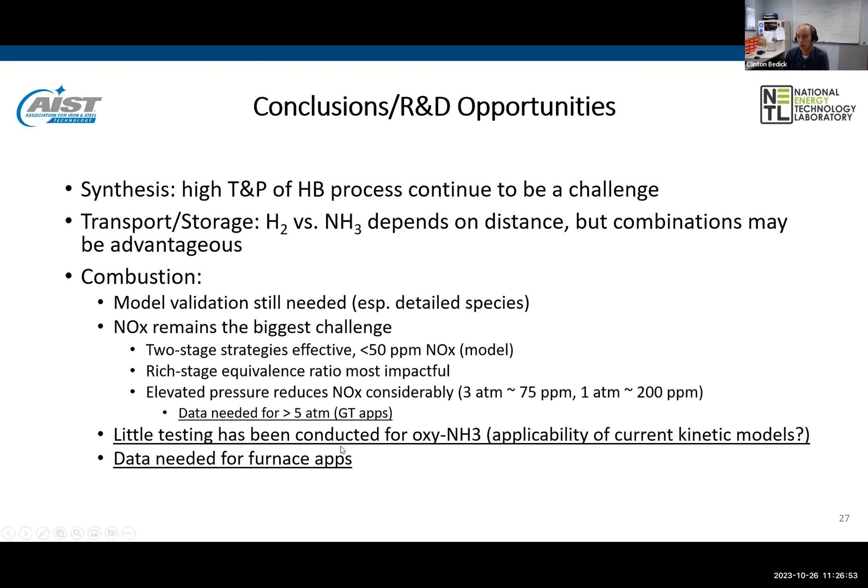I just have one more slide, but wanted to highlight that at NETL we have ongoing fundamental work, which is the stuff I was presenting with the flame images. We're in the process of expanding our ammonia work, developing a liquid storage facility and scaling up our efforts.

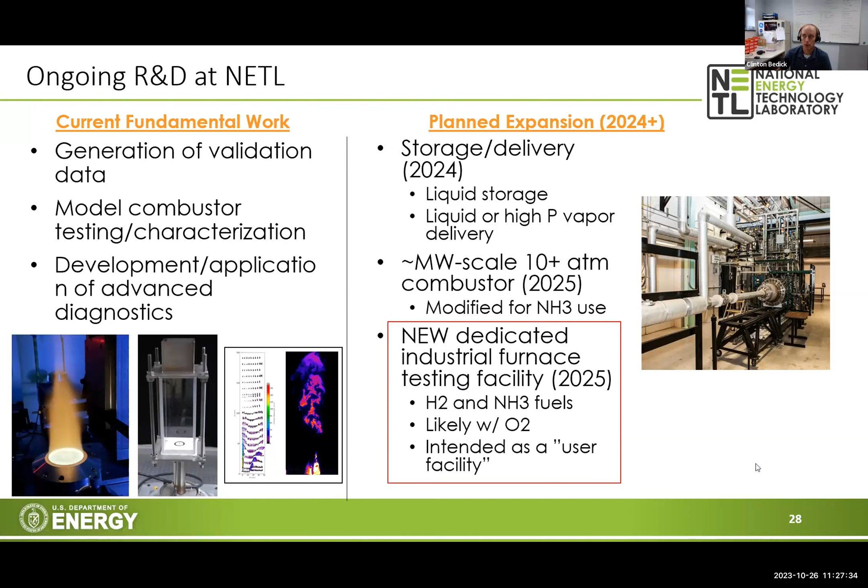We're going to have a high pressure combustor facility that we're modifying for ammonia. We're also working on a dedicated industrial furnace testing facility, in the 2025 timeframe. For hydrogen and ammonia fuels we should have oxy-combustion capabilities, and the hope is this becomes a user facility so we can collaborate with others developing carbon-free technologies.

I wanted to highlight that the next ammonia combustion working group meeting is Tuesday, November 7th. If anyone has interest, shoot me an email and I can get you on the distribution list. With that, I can take any questions.

Thanks very much, Clint, this was an interesting presentation. I don't think there's been as much attention paid to the potential to use green ammonia as a fuel versus green hydrogen. There's been discussion around green ammonia for transportation from remote generation, generally focused on decomposition and use. The work your team is doing is really interesting and fundamental in this respect. A question from the chat concerns the potential for corrosion from ammonia, is it a big deal for the systems you're using, but also in the event of leakage?

That's definitely a good point. There are a lot of materials challenges that need to be considered. Even in our small scale experiments, we had to replace a lot of components to make sure they were corrosion compatible, things like flow controllers, valves, etc. So as a drop-in fuel, I agree that's going to be something that has to be considered.

And the fact that it's toxic as well, that's really a separate issue, not part of the technical combustion challenges, but I think it remains a major challenge and potential barrier, the toxic nature of ammonia in general. Is there anything being done specifically from a research standpoint to address those handling issues if there's more widespread use of this fuel?